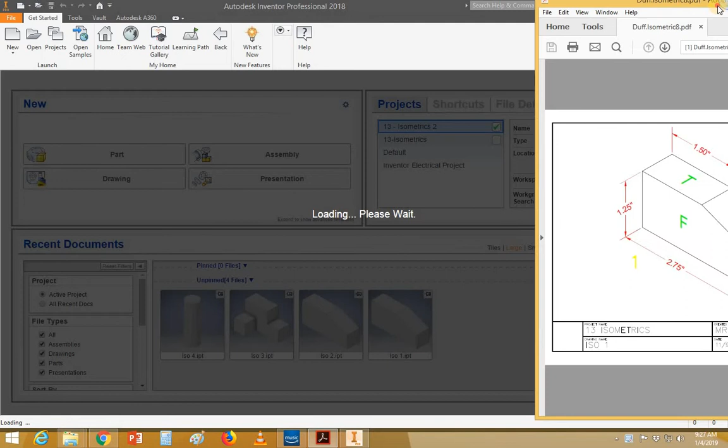Okay, so we're gonna pop in for the fifth drawing as well, because the fifth drawing is gonna get into some stuff that we haven't really dealt with before. We're gonna go to New, Standard IPT, and let that open up. I'm gonna split screen here while it's thinking. I hope... okay, it's really thinking. This is the drawing we're gonna do, right, it's number 5, and we're still waiting for that to kick in.

All right, so we have the split screen here. This is the drawing we're going to do. We're going to do this one because we have to deal with a fillet. We haven't done that yet, and we also have to extrude a hole, and there are two different ways we want to do that. We're also going to have to put a work plane on in a quirky way, and I want to show you why.

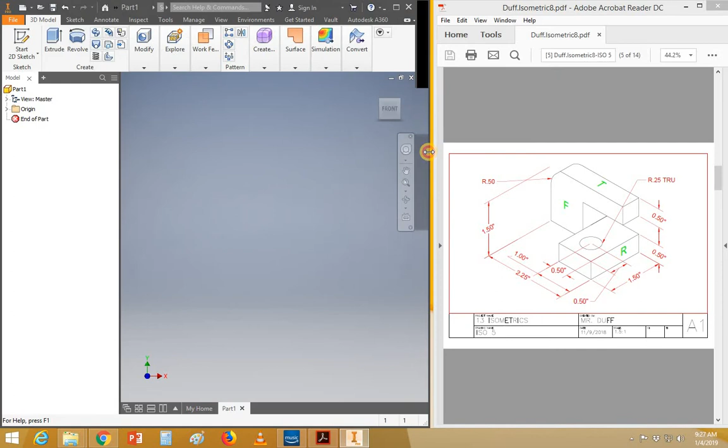So we're going to go to Start 2D Sketch, and we're going to choose the XY plane because you can see kind of where our front's going to be. We're going to really quickly draw our drawing here, right? So we're going to go up 1.5, then over, and over a square amount, so we're going to go over this 2.25.

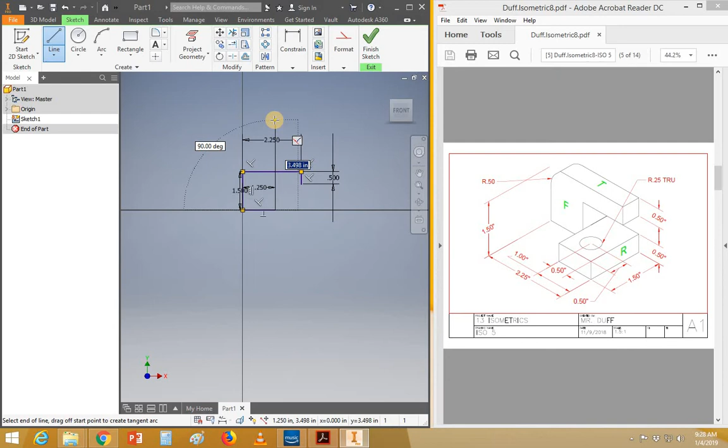We're going to ignore the fillet for now, and we'll go through and put it in after, 0.5. Enter, enter, and we'll come back down here and start over. You can see that green hard snap. We'll go over here 1.25, and I'm going to go up. So you can see in our dimensions we have a total of 1.5 in height, 0.5 here, 0.5 here, which means 0.5 left over. So we're going to go up 1, if that makes sense, hopefully. And then we're going to connect our dot.

I also like to take my dimensions and get them off the drawing as best I can. It's not always possible, but it's enough where it's just a little easier to look at. But if you don't do it, it's not that big a deal.

There are two different ways to put a fillet on. I prefer the second way, but I'm going to show you both ways here. So the first one is fillet. I'm going to expand this out full screen. Go to fillet, it's going to ask you for your radius, and if you look at our drawing, it's a radius of 0.5, so we're going to change this to 0.5. Then we're going to click on our edge, and you'll see it rounds it right off for us.

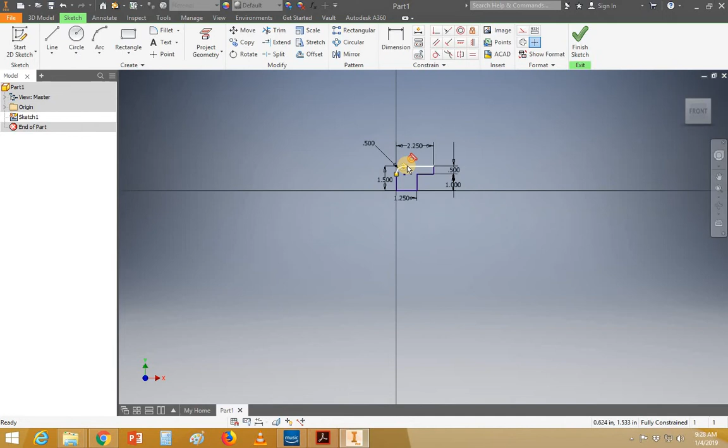You can also see when you click on it, it puts two tangent constraints on there, meaning that if this line were to extend past, if you were to make this circle bigger, it would only touch in one place. So again, if you were going to change that later, you'd have to take those tangents off, but we don't need to do that. Now I'm going to undo this once that's done. You could have just kept it and hit Finish Sketch, but I'm going to undo it so we can show you the second way in 3D space.

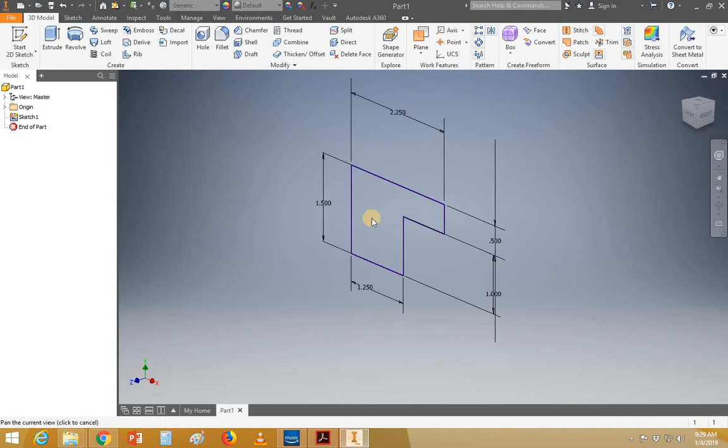So we'll hit Finish Sketch here. That zooms us into this mode. We're going to extrude it. Let's look at what our dimension is, how big it's supposed to be. We're going to extrude it a depth of 0.5. Again, if you're looking at this dimension, you can see it's 0.5. It doesn't give you this, this, or this, so we can assume this is a square. So we'll go 0.5, say enter, and we're good.

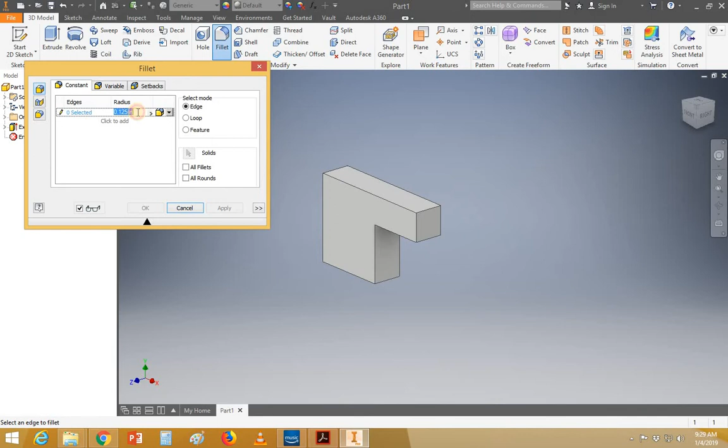So now if we come up here, same kind of idea, we go fillet, choose a radius of 0.5. Then you could select your edge, right? You can select any edge, really, and you can keep doing that over and over again. We'll hit cancel and do it again, but for us we just needed the 0.5 on the 1. Say OK, apply, cancel, we're good.

All right, so the tricky part now is, and I'll show you why it's tricky, I have to put another work plane on. Let's see if we can go back to this half screen kind of deal.

So that I can extrude this off, and that extrusion is off of this same back plane. If I go to Start 2D Sketch and click on my object, notice it takes my piece and puts it behind my sketch plane. Now it's like I'm drawing off of my back view.

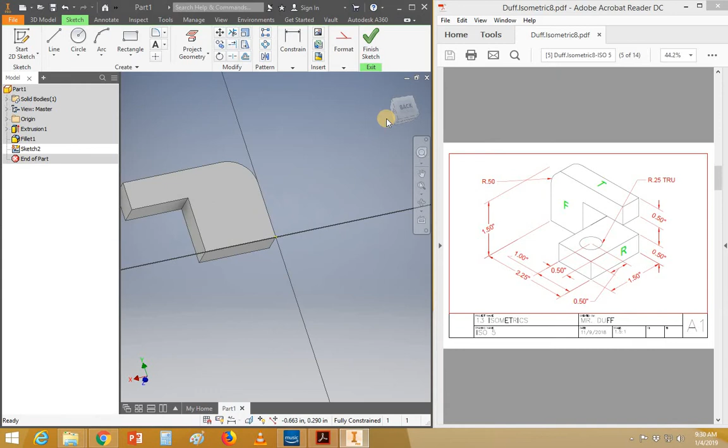Now there's a couple different ways I could have dealt with this. I could draw my object—this isn't how I'm going to do it, so I'll draw it quickly—but I could have just done this, right? And when I extruded it, finish 2D sketch,

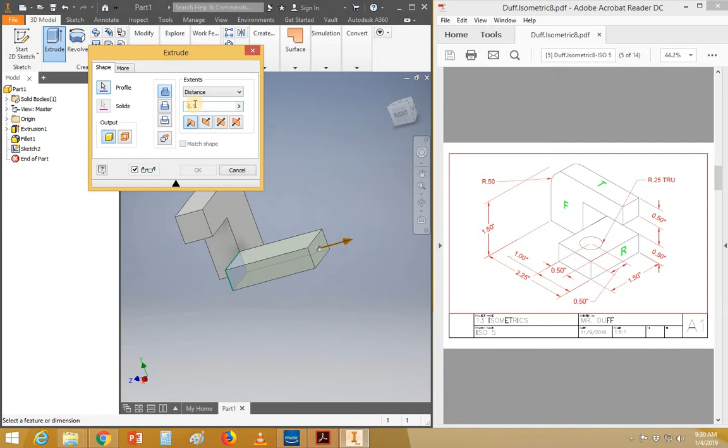I could just extrude it and go in a negative direction. This dimension is going to end up being 1.5. I could just put a negative in front of that to get it to go the same direction. That's fine, there's nothing wrong with doing it that way. Oh no, I got to make it 1.5, sorry, and change my arrows. Put it that way. I could have done that.

That's fine. What I would suggest doing, and I think this is an opportunity to show you how to do it—so we'll get rid of that. Got rid of all that stuff.

We're going to go to Plane, and we're going to put a separate work plane on. What we were just putting on was a sketch plane. Sketch planes sit on work planes.

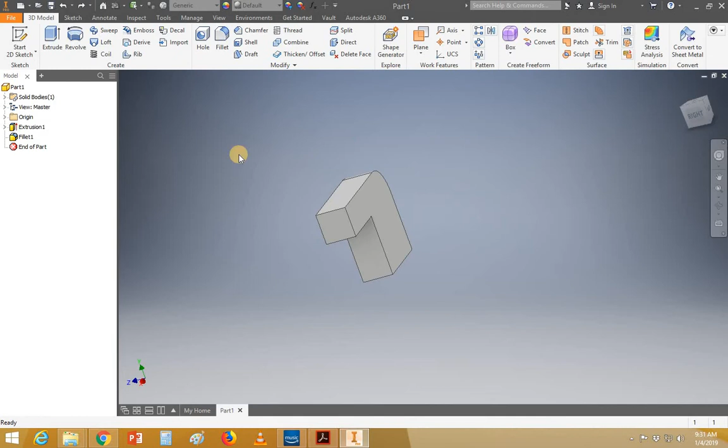If you remember when we first started, if I go to File, New, Standard IPT, and go to Start 2D Sketch—these are all work planes built within the program. It's not showing it right now, but if I go to the origin later you can see the XY plane. These are planes, and I can put a sketch plane on top of those. Then the work planes go away—they're there, they exist, but you can't see them anymore.

So if I go back to my actual drawing here, my part 1, I'm going to save this real quick too. Go to File, Save As. You can name it ISO 5. Say OK, or save, whatever.

All right, so what I'm going to suggest doing is that you put a plane on. I'm going to go to Plane, and go to Offset from Plane. I'm going to click on this—this would have been my plane. Then it's going to ask me what my offset is. My offset is going to be the thickness of my object.

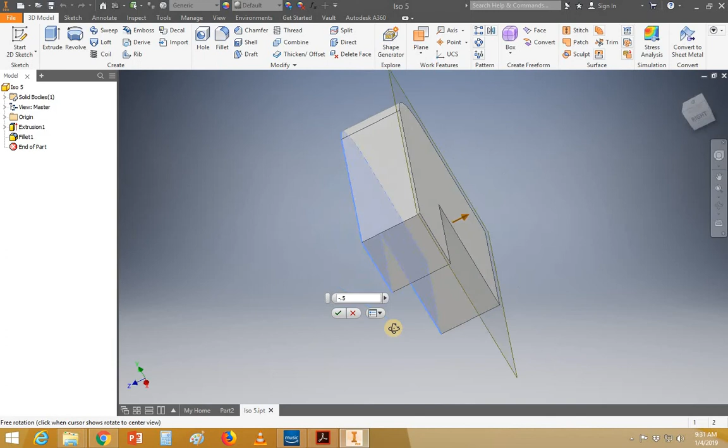So if I hit 0.5, now 0.5 is not going to work, it's going to go the wrong direction, so I'm going to put negative. Notice it sticks it right on the back. That's good, I'm going to hit the green check to say yes. And now if I hit front view, it puts me just how I want to be.

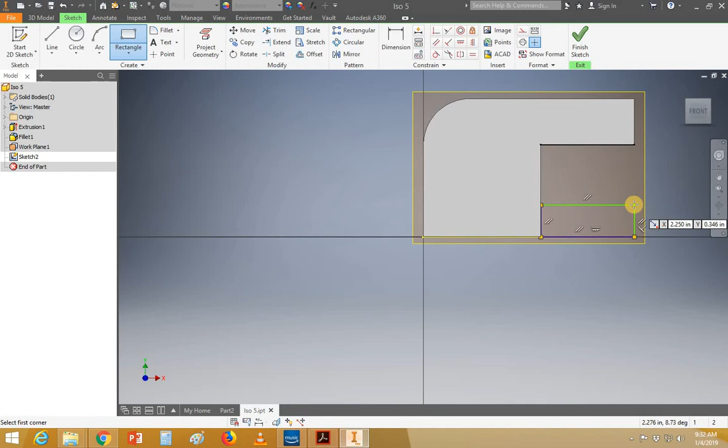Okay, so Start 2D Sketch, put it on our plane that we just made. Going to draw on our object. We'll grab the rectangle tool, draw this out, drag that down. We got to get this thickness on here. I'll just kick this over again so you can see the drawing as we're working.

That's going to be a height of 0.5. So put a dim on there—wherever it just went, we'll just hit D, and that'll bring up dimension. Make this 0.5, enter. I'm guessing it's going to tell us this will over-constrain. No, but it is correct. That should be 1, enter.

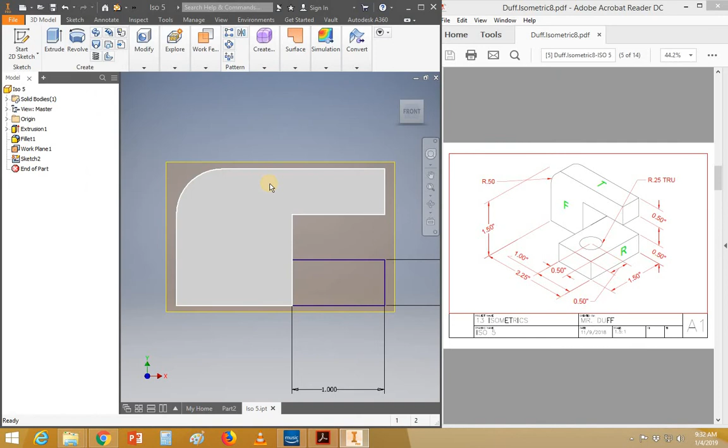Finish 2D sketch, we're going to go extrude. There's my object. I'm going to hit F6—we haven't talked about it yet, but F6 is isometric view. So if I hit F6 at any point, it'll put it in an easier to see view. Go to extrude, it's going to come off of our object 1.5, so 1.5. Say OK, and now I've got the makings of my object.

So now that I have that done, I have to go through and drill a circle, drill a hole through this object.

There are 2 different ways to do it. You can draw a circle and extrude it through, or you can put a point and drill through your object. We're going to do the second one first.

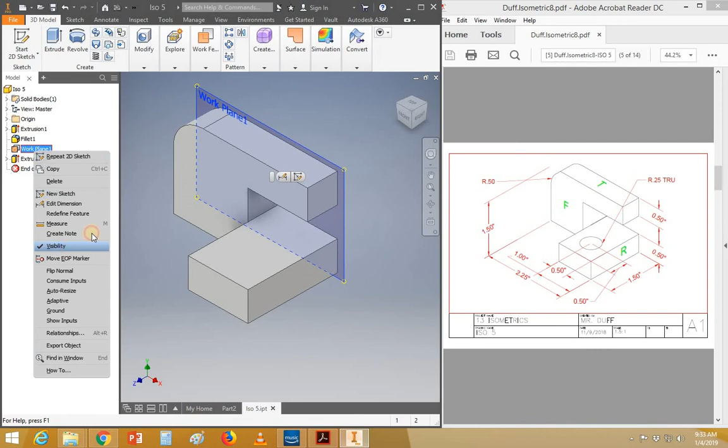So let's go start 2D sketch. Now I don't need to create a work plane. That reminds me of something else too. You're seeing this work plane sitting here. If I go to my work plane, now when I'm finished with my object, I don't want to see that anymore, that's just a reference plane.

So if I go to work plane and right click, I can uncheck visibility and then that one will go away, just a little hint for something helpful for yourself. Start 2D sketch, click. We're going to put a point, hole center in, and it always takes me a minute to find because we don't use it that much. Point, nope, right there, point. And I'm going to pop that on, I hope.

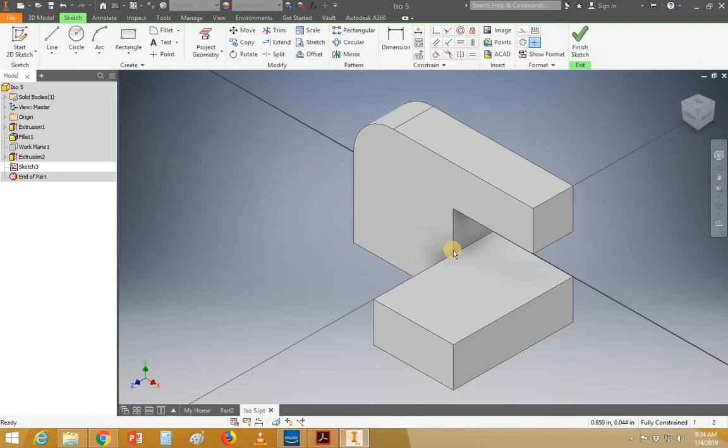F6. My sketch plane, is it not going the right place? I don't know. Okay, there it is. And my point doesn't seem to want to go on. Unless it's there and I can't see it. So...

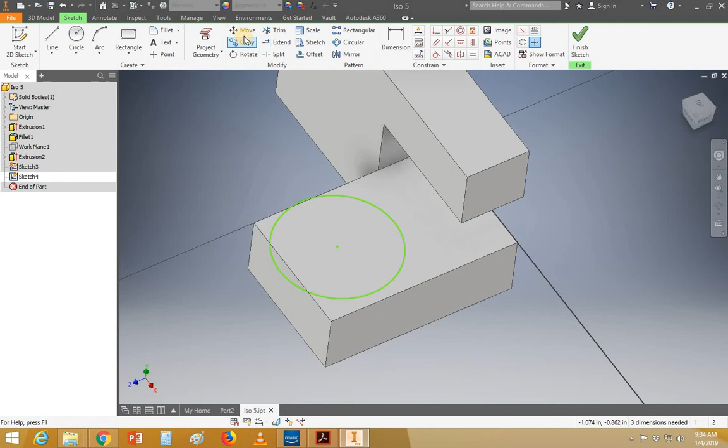Yeah, center point. Let me just draw a circle on here, just for a second. Ah, there it is. Sorry, grabbing the wrong one.

This is something different. Point is right here. Click it, just put it on there. And you can see there's a little green point there. Sorry about that. Then we'll dimension it into place.

D. Grab here, grab there. And again, if we go back to our drawing, it should be centered, so it should be 0.5 by 0.5. Enter. Dimension it again, 0.5. Enter. Then we can go to finish sketch.

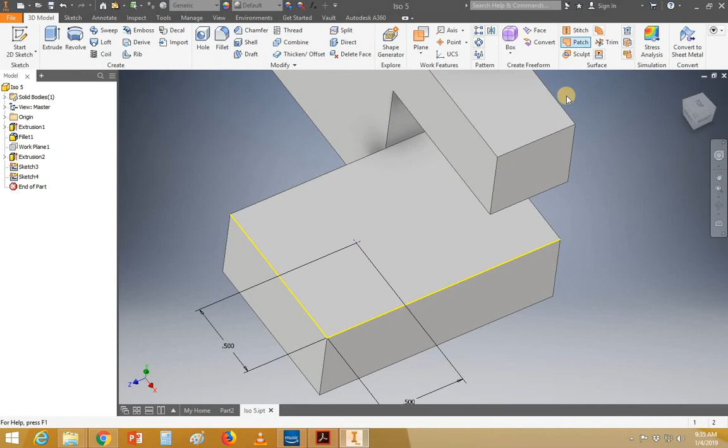And I can go to hole. And hole, if you want to do one, you have to have a center point to do it. So I can say my hole is going to go right there. And I have all sorts of stuff I can choose. We're not going to get into a ton of the details about it, but I could choose a countersink.

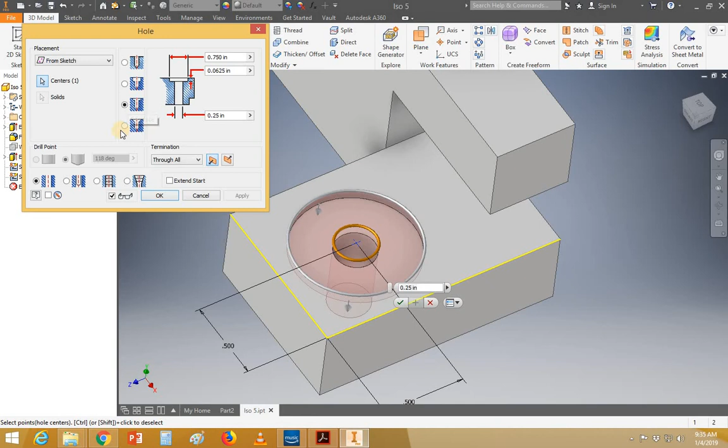You can see it's a different object there, and you can see what it does to my object. So it's going to drill this big bore out, then finish drilling through. Here's a wider, thinner one. Here's one that's more for like a screw head, but we're going to choose this one here.

I can choose threads to go inside of my hole, that's also an option, but we're not going to get into all that. My hole should be a thickness or a diameter of, I believe it's 0.25 radius, so a 0.5 hole. Okay, say OK.

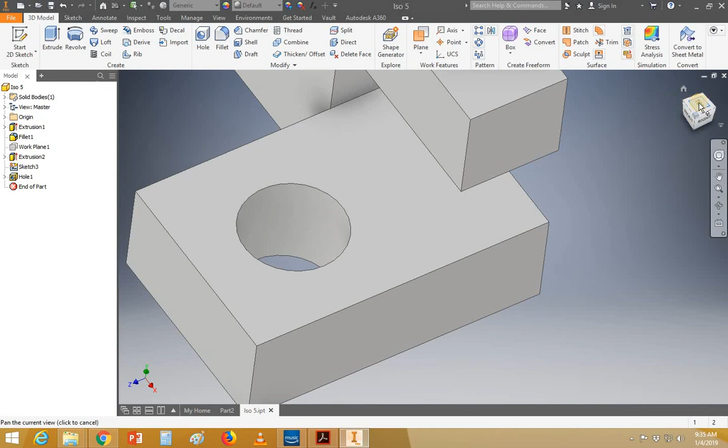If I go to my top view, see, it looks pretty good. Hit F6, looks pretty good. I'm going to undo that so I can show you the other way to do it. Go to delete, yeah, we'll get rid of those sketches too.

Put a sketch plane down. I believe I have an extra sketch kicking around right here because I was trying to figure out what was going on, I'll delete that also. But put a sketch on here.

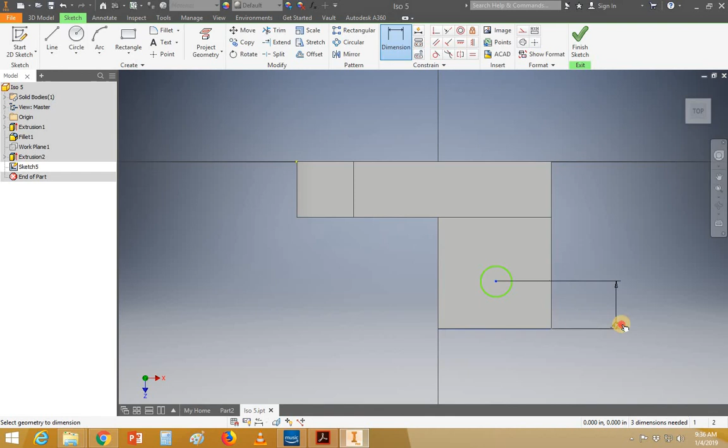Go to circle, put that on. Dimension it. D. There to there, 0.5, there to there, 0.5, dimension the circle itself, 0.5, finish 2D sketch, and we already kind of know how to do this, I believe, but go to extrude, choose our object.

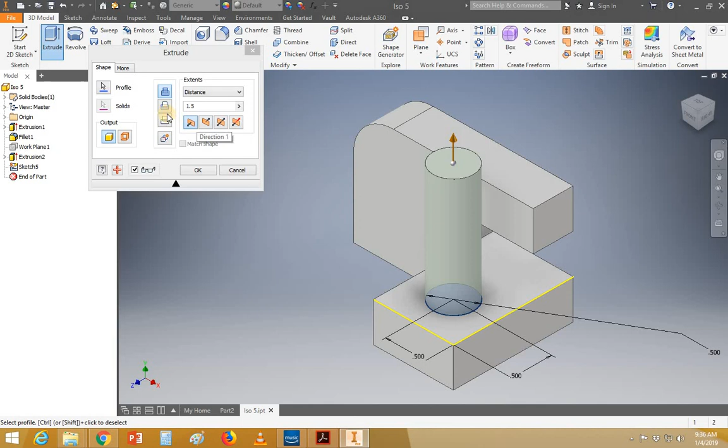Okay, we are going to change it, and we're going to go to cut. So if you see there's join, which would join it to our object, we're going to cut through our object. It's not really an issue because our 1.5 is plenty far enough, but it's good practice, when you're going to go through the entire thing, to just say all. So no matter how thick it is, it's going to go through everything below it.

Say OK, and there's my object once again. So that should get you through drawing ISO 5. I'm going to hit save here so that I don't lose any of my work. But other than that, if you have any questions, good luck and go to work.